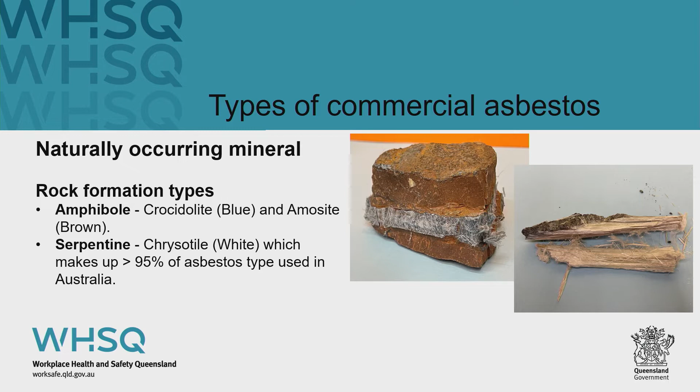Types of commercial asbestos. It's a naturally occurring mineral, with rock formation types of two groups: the amphibole and the serpentine. In the amphibole group you've got crocidolite, which is blue asbestos, and amosite, commonly known as brown asbestos. In the serpentine group you've got chrysotile, which is white asbestos, making up about 95% of the asbestos types used in Australia in manufacturing and the building industry.

Why was asbestos used in building products? It's a naturally occurring mineral and easily acquired. It has great flexibility, tensile strength, the ability to insulate from heat, it's non-conductive to electricity, and it's chemically inert. It was also very affordable.

The phase-out and banning: the use of asbestos in construction products was phased out from the mid-1980s. During that time the federal government ensured that warning labels must be adhered to the back of products so the building industry were aware the products contained asbestos — here are two examples of the stickers that were placed. The use of all forms of asbestos was banned nationally from the 31st of December 2003.

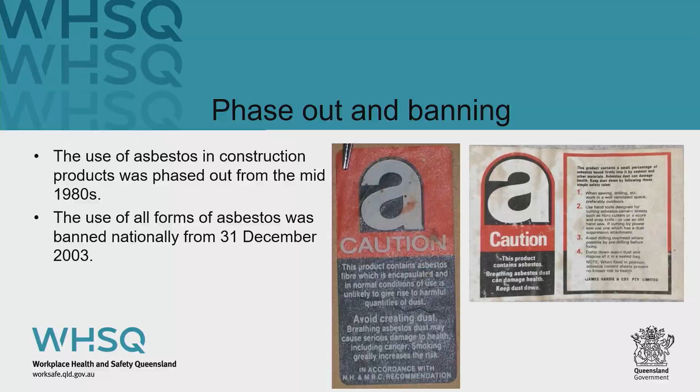When assuming asbestos is present in your home or workplace, as a general rule we look at the build date: if built before the mid-1980s, it's highly likely asbestos-containing products are present. Between the mid-1980s and 1990, it's likely asbestos-containing products are present. After 1990, it's unlikely asbestos-containing material products are present.

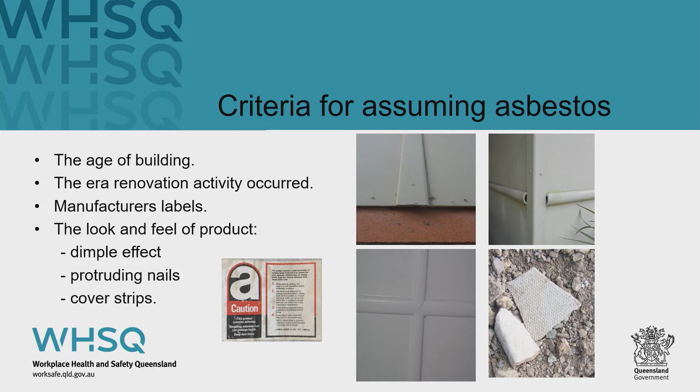Criteria for assuming: we look at the age of the building and the era of renovation activity that occurred. Generally if a building was built in the 1950s, a lot of renovations to kitchens and bathrooms took place, so different products were used. We also look for manufacturer's labels as shown earlier, and we look at the feel of the product — whether it's rough, has a dimple effect, protruding nails as seen in the slides, and cover strips. These are good telltale signs that there's an asbestos product.

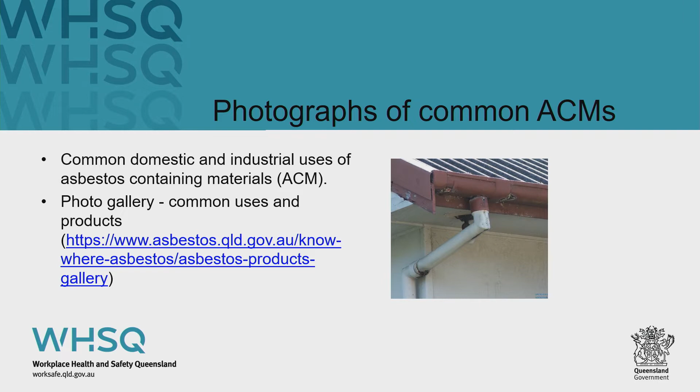I'm going to go through a suite of photos. There are over 3,000 different asbestos products, so I won't go through all 3,000 — we have a gallery of about 79 on our website. I'll just go through a basic selection we've got here, and I'd always recommend visiting our website, it's very helpful and useful.

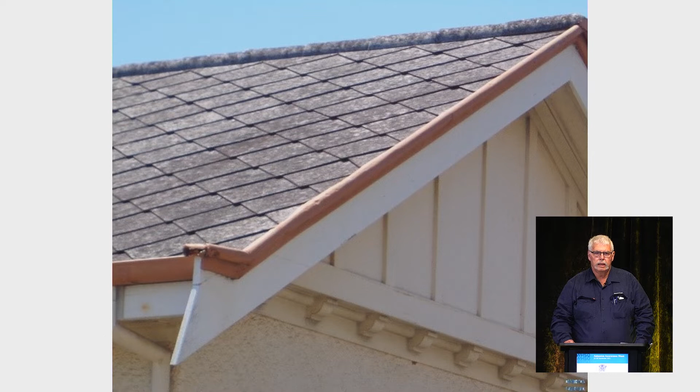Here we've got a product called the shingle tile. It's an imitation of shingle rock, but it's actually a fibro product — a 305mm by 4mm thick single shingle.

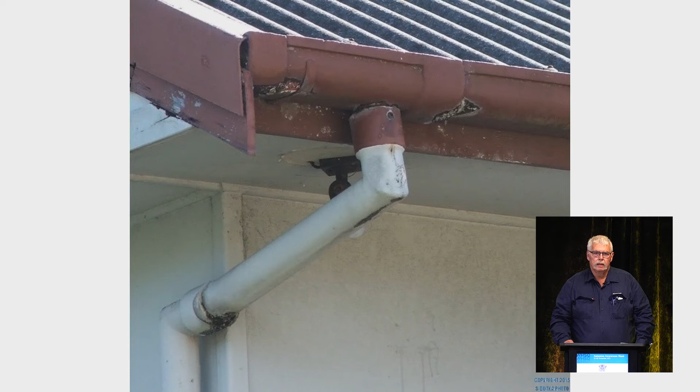Here we've got several products. We've got a Super 6 roof, the guttering, the downpipes, the cover strips on the corner of the wall sheeting, and the soffit sheeting and the barge cap.

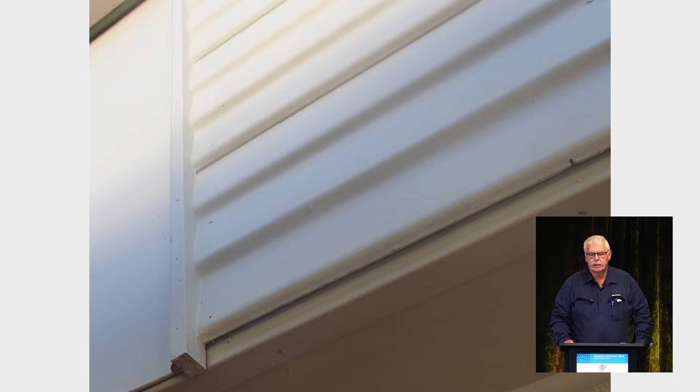Here's another product that James Hardie used to manufacture, called a Chamfer Board. You notice on the Chamfer Board there's 3 boards that make up that one board, and it was put down either horizontally or vertically depending on how the builder or architect wanted it. That's what the sheet looks like.

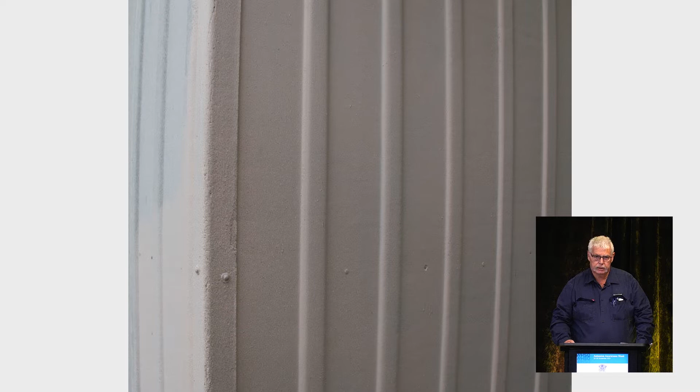This is a standard Hardie Flex, and it's a very old building. You can see the soffit sheeting, but also the asbestos moulding. That moulding was actually made out of asbestos cement product as well.

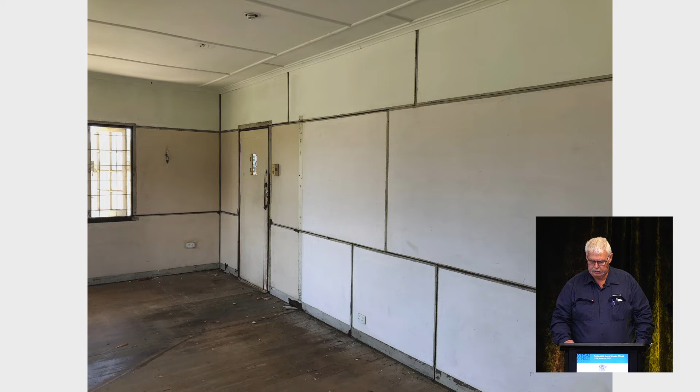Now I'm showing you 2 products here. You've got standard wall sheeting, but the ceiling was actually a product commonly used on walls, called Striated Sheeting. That's a very hard product, very unusual to have in the ceiling. In this circumstance, it was actually placed as a decorative finish.

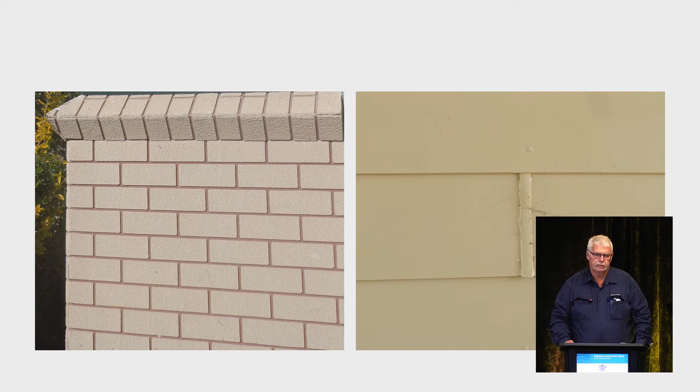Very common in the Brisbane area, you might see this brickwork. It's called faux brickwork or false brickwork - actually brickwork stuck on sheeting. It was just to update the old Fibro, straight Fibro buildings, to make it look like it was made out of brick. And then you've got the Hardie plank beside it, a smooth Hardie plank.

We've got Hardie plank there in the wood grain finish, with the imitation Oregon pattern, timber pattern through it, the grains. And you've got striated sheeting and asbestos cover moulds on that one as well.

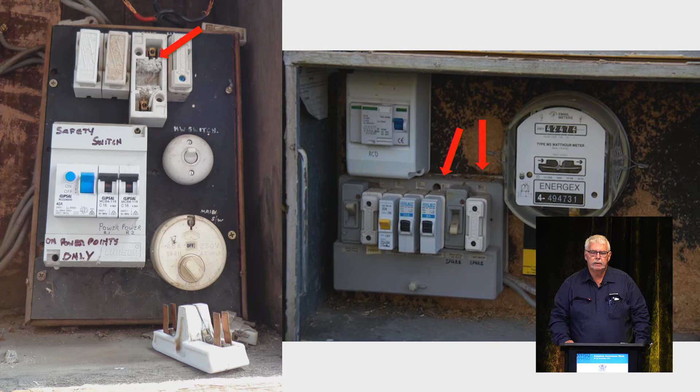Here we've got an electrical switchboard. You've got the product called Zelemite, which is the black part on the left. And you'll notice the arrow up the top there, indicating a textile material called a spark arrestor. That's actually made out of asbestos. It prevents the flame or ignition if there was a short in the electrical switchboard, to prevent fire.

The one to the right of the photo has two arrows showing. That electrical box is called a small package board. On that package board, because it was mounted on chipboard, they had to provide some sort of fire retardant - a 3mm piece of asbestos insulation board, or similar to an LDB product, that was used to prevent fire as well.

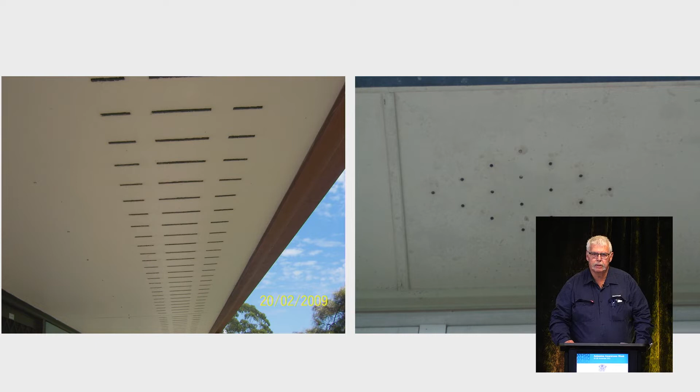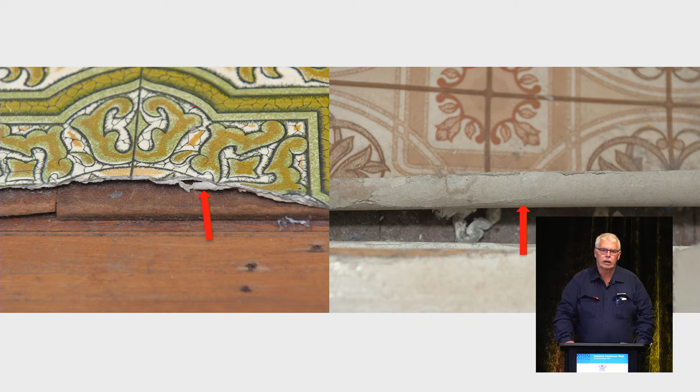Here we've got something quite common in a lot of homes in Australia, called domestic sheet vinyl. You can see the timber floor, and then a masonite backing or underlay, which makes sure the sheet vinyl lays on something nice and flat and level. Then you can see that grey backing affixed to the sheeting - that is the asbestos content, and that is a friable product. There's also a different pattern to the right, showing what the product looks like.

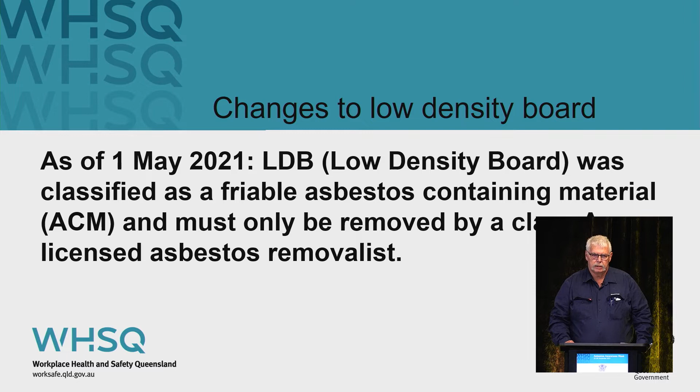Now, changes to low density board. As Jody mentioned before, as of the 1st of May, it was mandatory that low density board was classified as friable containing material and asbestos containing material, and must only be removed by a Class A licensed asbestos removalist.

Changes to low density board. Only the following 5 maintenance service work on LDB is permitted when done in accordance with the low density approved methods. Jody spoke about those 5 approved methods: minor repairs and minor damage to LDB, the painting of undamaged LDB, the drilling of holes of 30mm in diameter maximum into LDB, the temporary moving of LDB ceiling tiles, and installation and removing of fixtures or fittings to the LDB. All these safe work methods have, as Jody said before, safe methods, PPE, and a preferred method of removal and working with it.

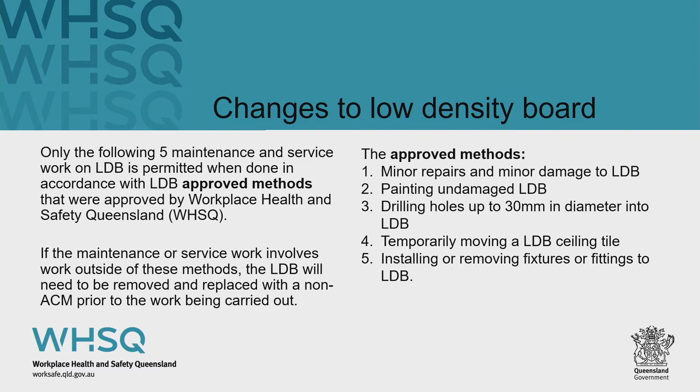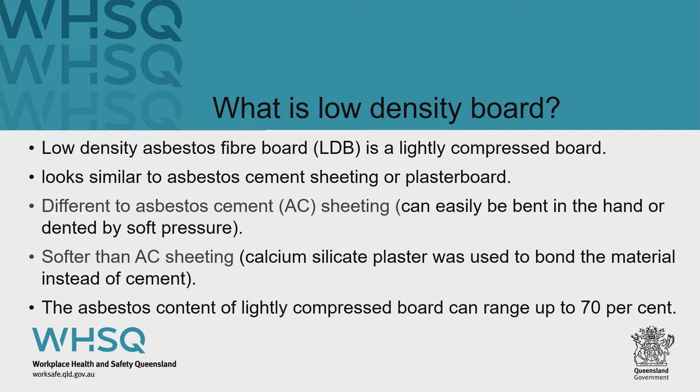What is low density board? Low density board, or LDB, is a fibre board, a lightly compressed board. It looks similar to asbestos cement sheeting or plasterboard, but different to asbestos cement sheeting, it can easily be bent by hand or dented by soft pressure. It's softer than asbestos cement sheeting because calcium silicate plaster was used to bond the material instead of cement. The asbestos content of the lightly compressed board can range up to 70%. It was manufactured as a flat sheet product, although some perforated sheeting typically used for acoustic ceiling applications was also manufactured. Commonly known as low density asbestos fibre board, some product names include Asbestolux and Duralux.

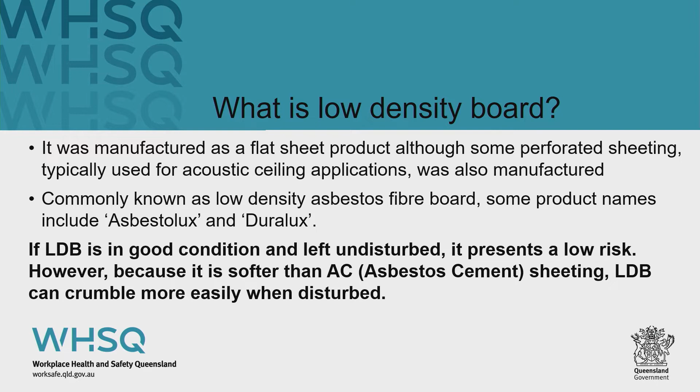If LDB is in good condition and left undisturbed, it presents a low risk. However, because it's softer than asbestos cement sheeting, LDB can crumble more easily when disturbed.

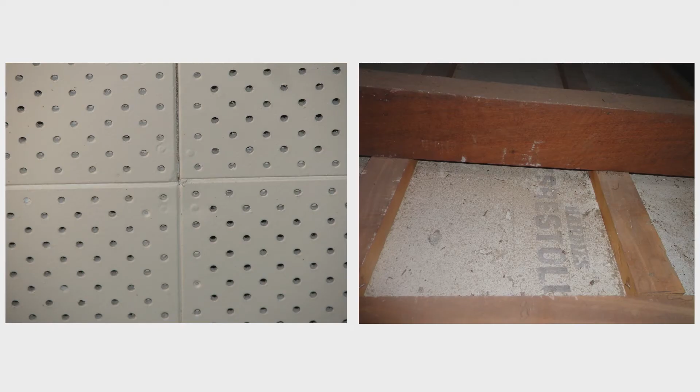Here is some perforated ceiling sheets. You can see the joint, and you can actually see a close-up where the nails are, but they finished flush with them. Now, how do you tell that those perforated ceiling sheets are LDB? They measured exactly 4.8 millimetres in diameter, which is the old 3/16 in the old inch scales.

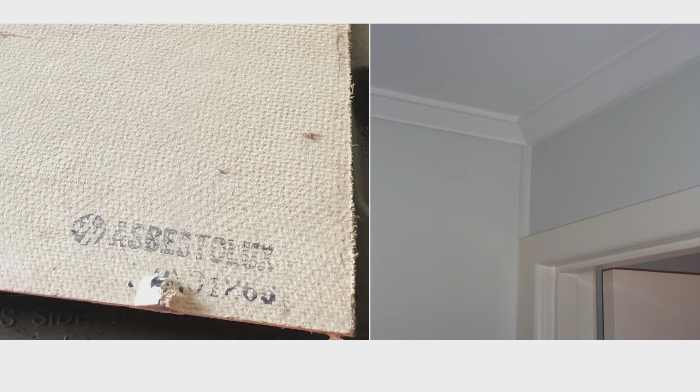Now the other one there, you'll see it's taken inside a roof cavity. In that roof cavity, you can see it's stamped with Hardie's Asbestolux. And here's a sheet of Asbestolux that was pulled out by an unsuspecting homeowner in their property when we inspected it, and it actually had the words James Hardie Asbestolux. You can see it's very white and wavy, not really a dimply effect - I'd say it's similar to a Hessian bag sort of finish, and you can see it's very fibrous.

Now the other photo on that side there, you'll see that's actually my brother-in-law's house, and in that house he's got LDB throughout, but it's in good condition. It's painted, you've got timber cornice and quad fixing it and architraves. There's no risk, everything's okay - it's painted, there's no risk to health in that situation.

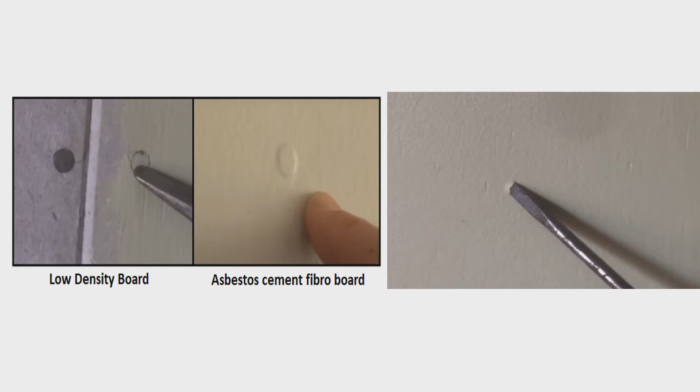Now, for more information, we go to the asbestos website. We've got a guide, which is what I've got here. In that guide, it's got some very good information, but on pages 22, 23 and 24, you've got some illustrations that actually tell you exactly where asbestos could be found in your home.

So that's the end of my presentation. Thank you, Chris.

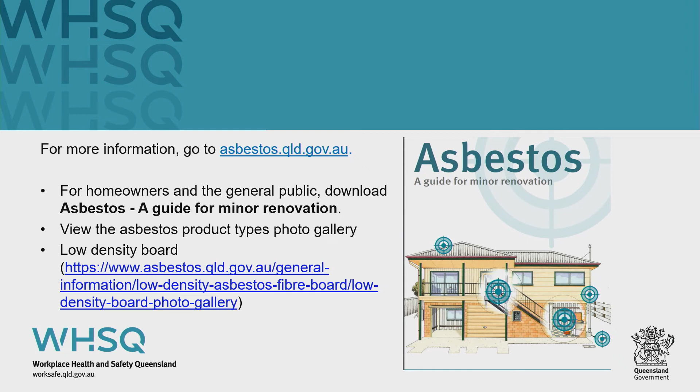Thanks, Stephen. Amazing just how many products asbestos or asbestos-containing material can be found in. And as someone who might be doing some renovations to their home down the track, I'm a bit nervous now, so I'll have some questions for you, Stephen, a little later on.

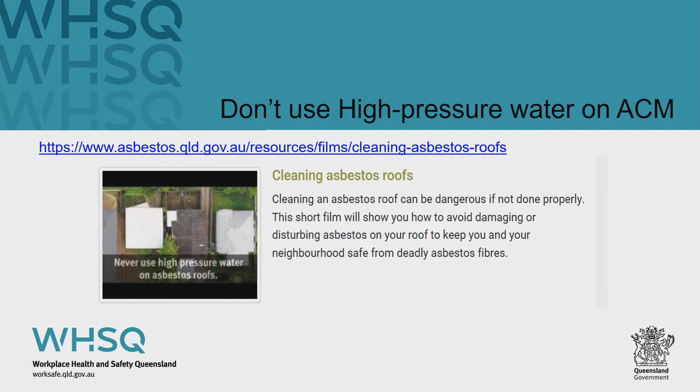What's happening? Getting up, using the high pressure washer, and it literally snows fibres. And when I say it snows fibres, it's the neighbours on the left, the neighbours on the right, the neighbours behind, the footpath, the road. It's a right disaster, particularly given one fibre can kill.

There's a short film there that I recommend, about 3 minutes in length, that you can go and have a look at to give you an idea of what our team regularly looks at and provides advice for. It's been occurring far too much recently.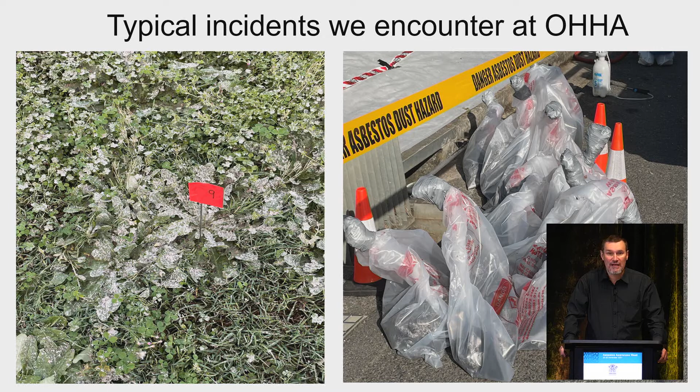It's everywhere, can you imagine? That's why we just dig it all up and take it all away. On the right-hand side, that is the waste that's been picked up easily and put in bags, and that needs to go away, be transported carefully and buried in a controlled manner.

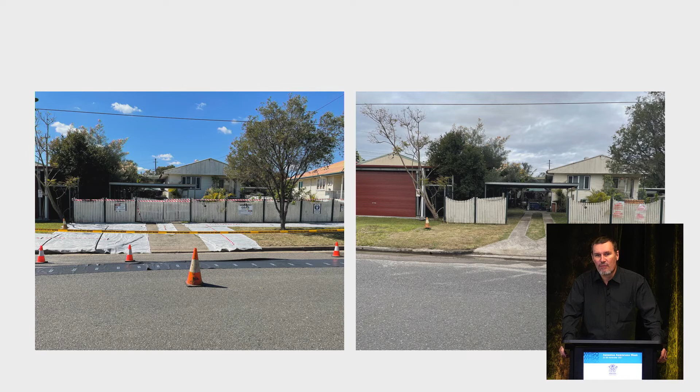It's there forever. In this picture, you can see at this property the spread. It's on the road, so you can imagine if children are walking home from school, or somebody's walking the dog, they are at risk. This is how big this type of concern is.

On the left-hand side, you can see the controls in place. They've come and put the geotechnical fabric in, because one of the good things is, when this was a reported incident, it was still wet. It hadn't dried out, so the wind wasn't picking it up and distributing it goodness knows where. So they're able to come in quickly and put these controls in place, assess it, and then start getting the quotations in underway to come and do a big clean-up.

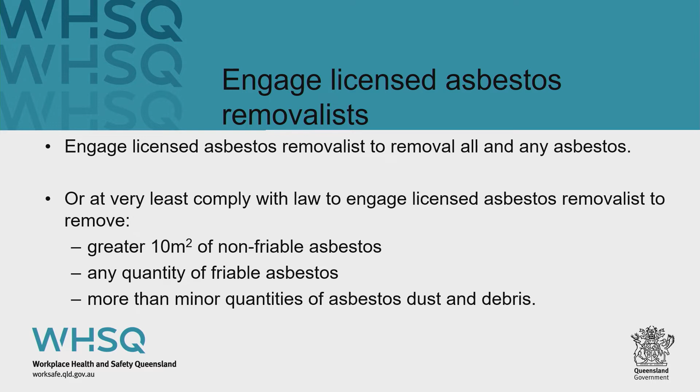So what must always occur is you need to engage a licensed asbestos removalist to remove all and any asbestos. You cannot do this yourself. It is not a DIY. You must at very least comply with the law to engage an asbestos licensed removalist to remove anything greater than 10 metres squared.

So to give an example, if you went to do your bathroom at home, that was most likely going to exceed this amount, so it's not something we encourage at all. It's better to get the professional in who have the PPE, the RPE, and lots of experience. And more than minor quantities of asbestos and dust is the other part.

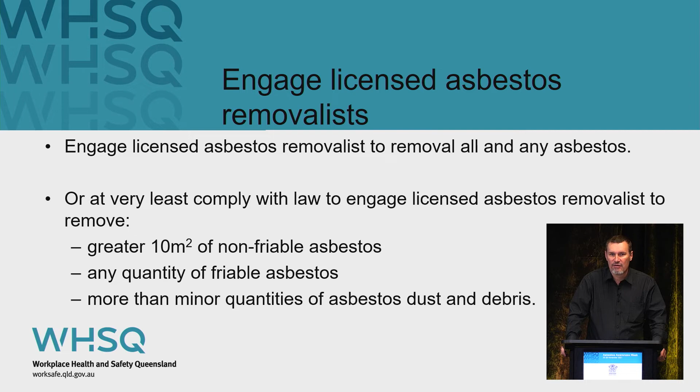So be aware, you can be prosecuted or fined. If you don't comply with the asbestos laws, you're likely to be fined or prosecuted. It's going to be a very expensive and painful process.

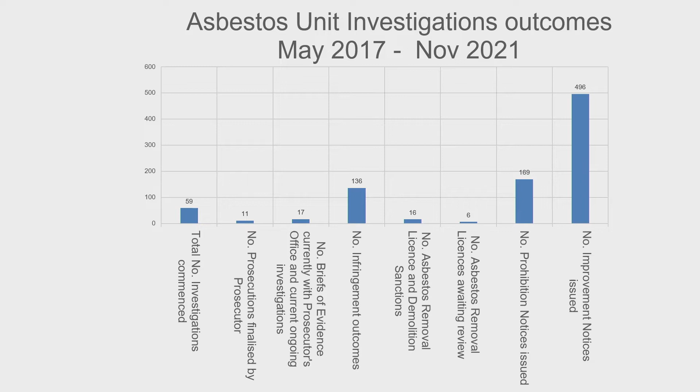These statistics I've got here relate to asbestos outcomes that we have. You can see the ones here from 2017 to 2021. And given that it's a lag indicator and the weather that we've had, I'm sure there's going to be many more incidents than these.

People are renovating their lovely homes, but there are those risks there if you are not aware and you don't put the controls in place. That's me.

Thanks, Paul, appreciate that. I had a look at that publication, that house - I grew up in a house exactly the same as that in Cannon Hill as a young fella with my family in the 70s. The only difference for our house was that we had timber battens down the side and it wasn't enclosed, but the laundry was downstairs. We had that tub, we had the upstairs, we had the panels. That was our house almost to a T, and then Mum and Dad enclosed down the bottom like we did in the 70s. So that house probably still exists in quite a number of locations throughout Queensland and probably Australia.